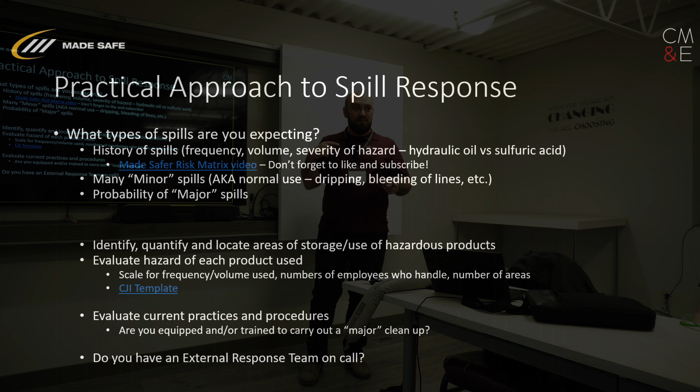We spill catalyst. What's the hazards with catalyst in your department? Is it a carcinogen? Should you be wearing respirator protection? What kind of respirator cartridges should you wear? Or are they the pink flat ones? We use the organic filters, organic material filters. Organic vapor, yeah, you got it, that's the one. Those flat pink ones are only for dust. If you have an organic vapor cartridge that has a pink cage over top of it, that might be telling you it's also got a dust filter in there. So have a look, the color coding on the cartridges is telling you something.

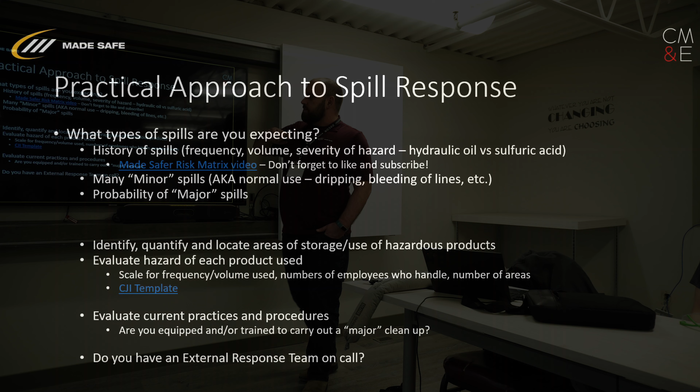We're gonna jump past this one as well. Failure to plan is planning to fail.

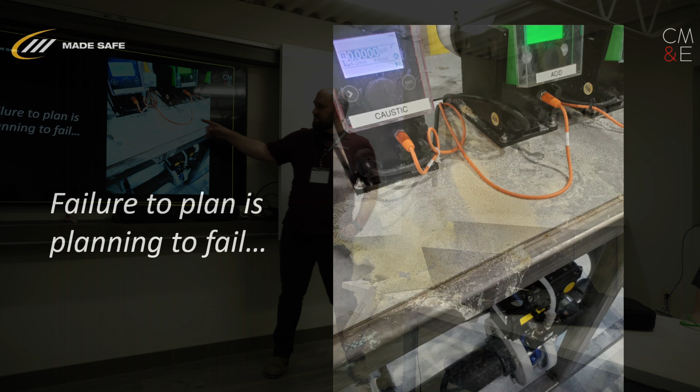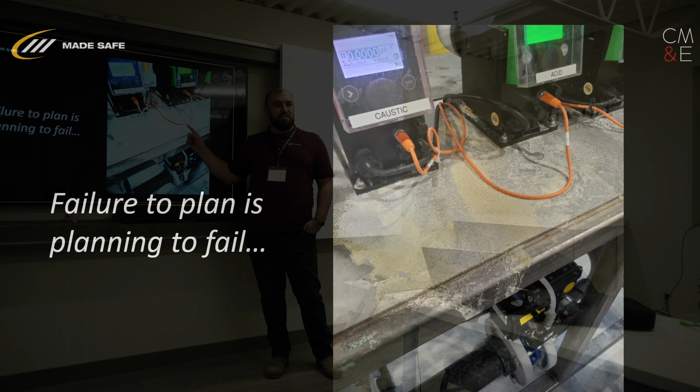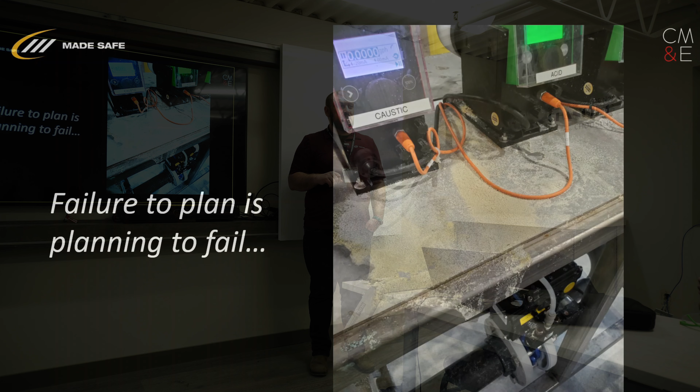This here is a piece of equipment, two pieces of equipment that inject caustic or acidic chemicals into a food production process to help sterilize the lines on a regular basis. Problem is that the acid and the caustic actually eat away at the tubes that feed them in, so on a regular basis they just let go. There's a leak, that's what all of this you're seeing here is. If they know that every 10 months it's going to spring a leak, they should put it on a PM schedule to replace those lines every 8 months.

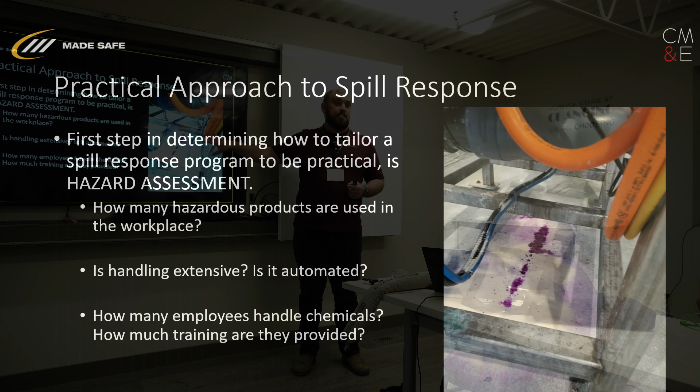Simple as that. What we see down here, now this is an acid line. This aggressive spill material, this acid-only spill material, changes color when it's used up. It starts off yellow or yellowish, and as the acid drips and the material absorbs it, it starts changing color, and when it's fully absorbed it's that bright pink. Now walking past, I know that this needs to be changed out. Make sense?

Failure to plan is planning to fail. Think about it in your own department, and if you haven't thought about it yet, take a look next time you're walking through.

This is a big spill. That's acidic, it's changed the patina on the stainless steel table. That's how often it's being spilled, you can see that there. When I walk through, I know that's a spill area.

Let's plan for it. Maybe we need a removable liner, or maybe we need these things to sit in an acid-resistant tub. Just having it sit there and leak, and then spill off the side uncontrolled, that's not a great idea.

We don't want to spend a ton of time cleaning up spills, we want to spend time making product. That's why we're here, so anytime we can control that, it's far preferable. So start with, where are we having spills? And even if you're not having spills right now, or it's not something that gets talked about regularly, walk through and see where you've got staining on the shop floor.

This is super common in machine shops. This doesn't happen here, of course, but other places I've heard - oh, there's a spill, and someone will throw a bunch of absorbent material on, so I've done my job, and they walk away. That's it, they're done, they're not doing anything else with it. Trouble with that is eventually you end up with 8 inches of absorbent material under the machine, weighing 300 pounds because it's soaked up everything.

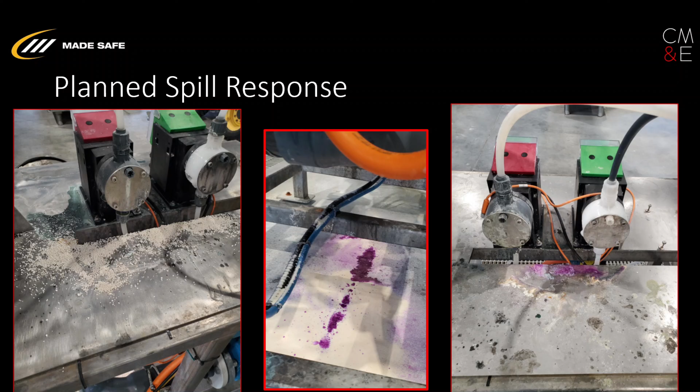But again, rather than doing a cleanup, let's get an acid-resistant tub in there that contains it. Then you can either use a pad or the absorbent material, and it's this tiny area that you've got to clean up, not this larger one that could be uncontrolled.

This was a neat one. It leaks here because, again, it destroys itself. But instead of running this line like this and having it drip all along the way, they made this hose an extra 6 inches longer and gave it a low spot.

So now all the drips happen here. They know it's going to keep tearing itself apart, so what they do is build in the failure point, and now they only have to protect against it here. Super smart idea. This one here, lots of leaking over here, but it's tough to see in the picture.

There's a low spot in the floor that runs down to this drain, so that's on purpose. They're containing all the spills here because they know the machinery is just going to keep doing that.

I have a question. Yes, sir. Is there not a better way to protect against acids, like with the material they're using, tubing and all that? Not that they've figured out yet.

Okay, and there may be some considerations. Like this is a metal-to-metal joint that's failing because the acid is actually eating the metal. It's breaking down that contact between the threads, and it's pretty intense. Maybe they could go to one solid piece, but there still has to be a joint, and eventually it's going to break it down. And they can't spend a million dollars on tubing.

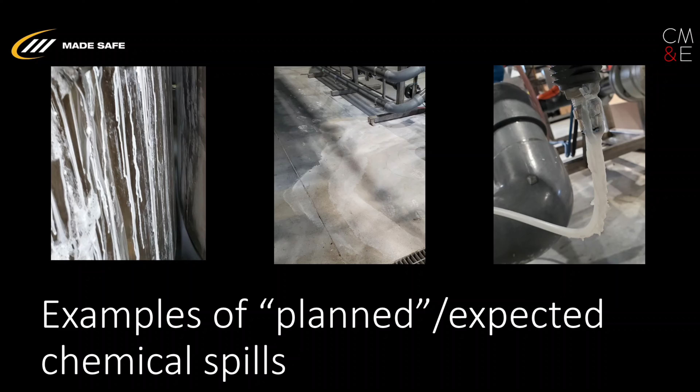These guys are stuck with what they've got. Now, is everyone familiar with granular absorbent?

I'm sorry, it's like with Kleenex. I would call it Zorbol, but Zorbol is an actual brand name. Multizorb is another. There's one that has something to do with a Ninja - I don't remember the full name, but the Ninja part of the branding I remember.

This is like kitty litter, but it's not kitty litter. I want to say diatomaceous earth is what makes it up. Reg is confirming, so that's it. Great stuff. Kitty litter doesn't do the same job, it does not function the same. Don't use kitty litter - you've got the right material here.

And we did a video a couple years ago on how to use that material. Let's have a look.

Now let's clean up an oil spill. Don't worry folks, it's canola oil, no extra PPE required. As with all spills, start with putting absorbent material around the spill to contain spreading, and then cover the top of the spill. Remember, the smaller the surface area of the spill, the easier it's going to be to clean up.

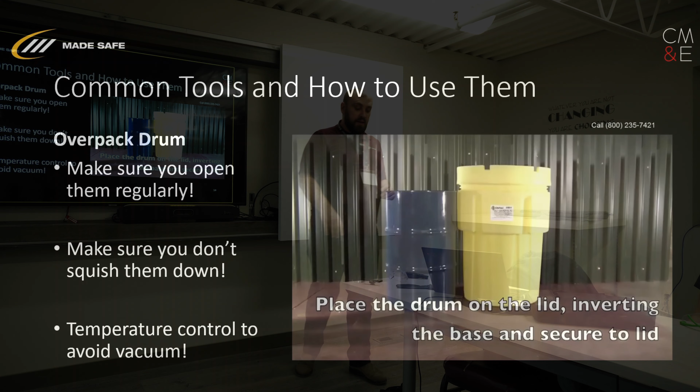Now, I understand you guys don't have any of these - the overpack drums. Usually these contain 95 gallons. Oftentimes I've bought spill kits and all the spill kit stuff comes in these. Your wheelie drums are much nicer for going from spot to spot than this. But these have an advantage.

If you bump one of these 45-gallon drums with a forklift and put a hole in it, it's going to leak. So the first thing you need to do is tilt this barrel over on its side. This is actually not a great way to do this, because he's got to pick this thing up and flip it over, and it's probably about 60 pounds. Then he's going to pick the whole thing up and stand it back up, which is just not possible with a 45-gallon drum - or not possible for me. Shauna, sure, but not everyone's as strong as Shauna.

So this spill would be completely contained. What Reg and I would do is take that drum and tilt it over, making sure the hole is pointed up. If the hole is pointed up, you're not leaking any more material. Then we'd stand on either side of the drum, bring the overpack over and slide it in so the drum is inside the overpack. With two people, you've got good handles to stand it up. You should also be able to get forks in here, or you've got a drum lifter attachment for the forklifts that you can use to stand that up.

If you end up with one of these, you've got to open them regularly. Temperature changes will create a vacuum inside, so getting that lid off becomes extremely difficult. It's got these little things here - you can literally put a bar on there and use that for extra leverage. And then don't squish them. You'll see these things with 60, 70, 80 pounds of stuff stored on top, and that's just packing those threads really tight, because this needs to be watertight so the threads are tight.

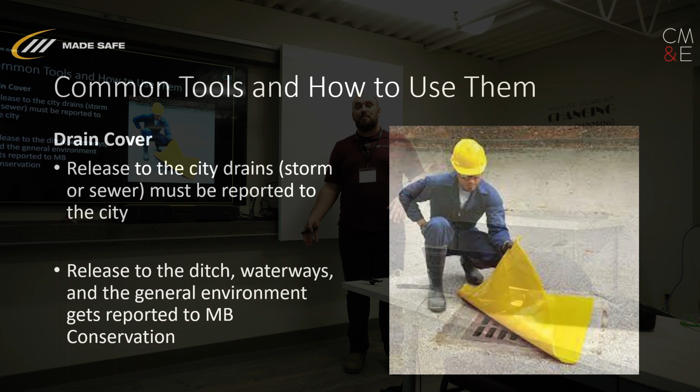We actually had to call our salesperson in and say, okay, we'll give you a big bunch of money if you come in and prevent us from having to call Manitoba Conservation. He had stuff in his garage - it was 6 o'clock at night, it was an ordeal. You don't want to dilute, you just want to contain and then clean.

Do you guys have anywhere where you've got pipes moving material? Yeah, there's tons of places. In and around the paint lines, there's hard piping. But even flexible piping is the same thing.

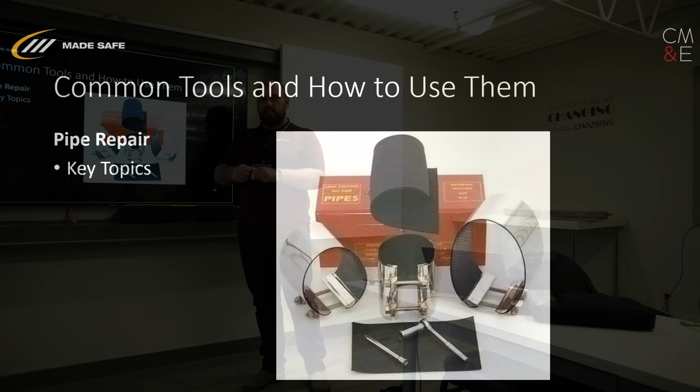This is a little neoprene patch. You put that around, you put the clamp on, you tighten it up. It's not fixed, but it's not spilling everywhere. And that's the same thing with the wrap. This works much better with hydrocarbons and low pressure hydrocarbons, so it can't be shooting out, it's gotta be a dribble. This isn't fixed, it's just enough for now.

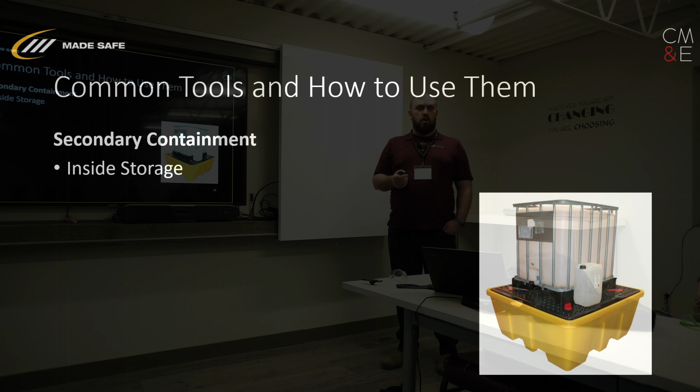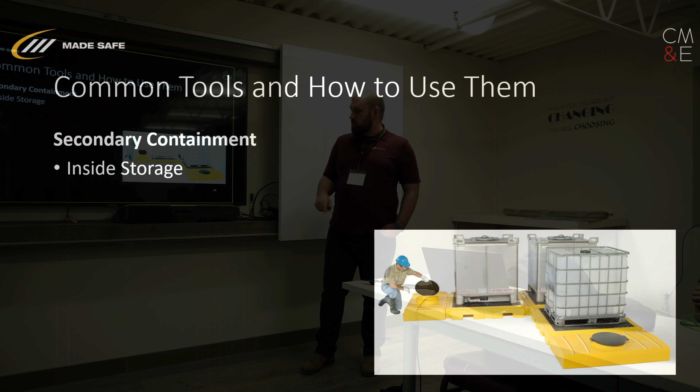And then here's an example where it's got an external reservoir as well. So these are connected and then it also has the reservoir.

You mentioned you guys store chemicals outside. Sometimes they don't like being exposed to the sun. Today is pretty sure it's gonna snow, but it started out thinking it was gonna rain. So while it was raining, you've got those drums out there. Sometimes the screw-on bung cap isn't replaced properly, sometimes it's not replaced at all, and so then you end up with contamination.

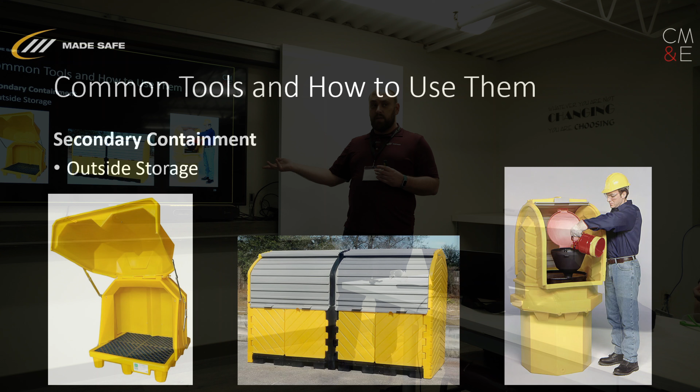This prevents that. Sometimes they react, the chemicals inside will react with heat or the extreme temperature change or sunlight, that UV energy. So you're going to want to make sure that you've got it appropriately protected.

This is really nice for outside storage. And we sort of go through this because we don't want you guys to have emergency spills. And Shauna can't be everywhere. So you're going to see places where we've got existing spills long before Shauna does, because you're there working around it.

So for outside storage, this is held up by little metal rods that are bent into an L. And if I wanted to drive the forklift in there, I would just pull 5 or 6 of those rods out, drive it in, drop the pallet down, back it out, and then put the little rods back in, and it's good.

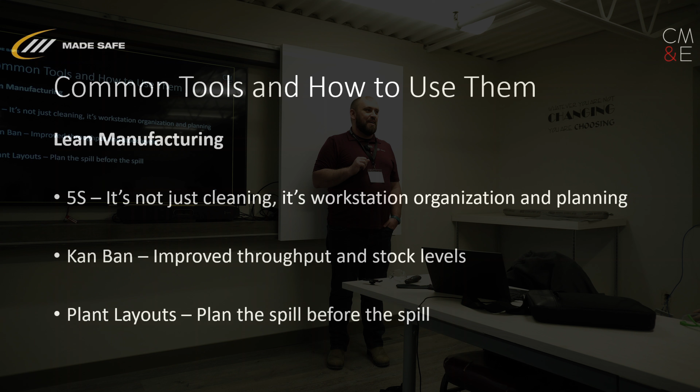Again, we want to work smarter, not harder. So 5S, you guys are familiar with 5S? You guys are great at 5S, to be honest. On a regular basis I'll find other plant managers and say, you should talk to Frank, they do really cool stuff at his place. And Frank is always gracious and says, come on down, absolutely. It's not just cleaning, it's the organization, it's the planning. Your workstation, when it's clean, you're going to have fewer spills.

How much do you need at your workstation, with that Kanban system? Do you need 9 five-gallon pails? Do you need a 45-gallon drum? Or can there be a central station that you go fill up at and bring just what you need for that shift back to your workstation? So if you spill, it's 4 hours worth instead of 9 months worth. That often makes the biggest difference. Then look around, see the places where there are stains on the floor -- that's where the spills are happening. Can you capture it somehow? Can you make it so those spills aren't uncontrolled?

And with that, we are done here. Everyone stayed awake, nicely done. It's very close to lunchtime, and the only thing standing between you and lunch, other than the hour it takes for you to get to your actual break, is for us to go out onto the shop floor and do a little bit of a practical thing.

Does anyone want to volunteer to be the broom operator? Yeah, come on in, it's pretty loud over here. So we're good, right? We're done? Shut her down, head to break? It feels like coffee time. No, no.